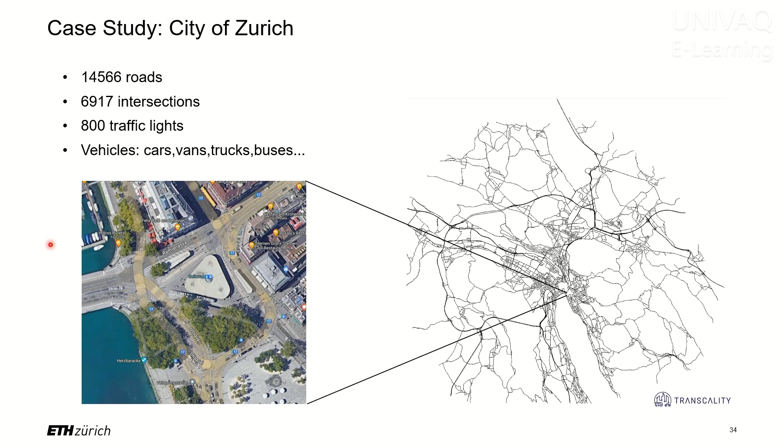So this is a little chunk of simulation. This is a micro simulation, it simulates individual vehicles with following policies and so on. And you see them at the different traffic lights around this intersection that we can use to control the flow of cars.

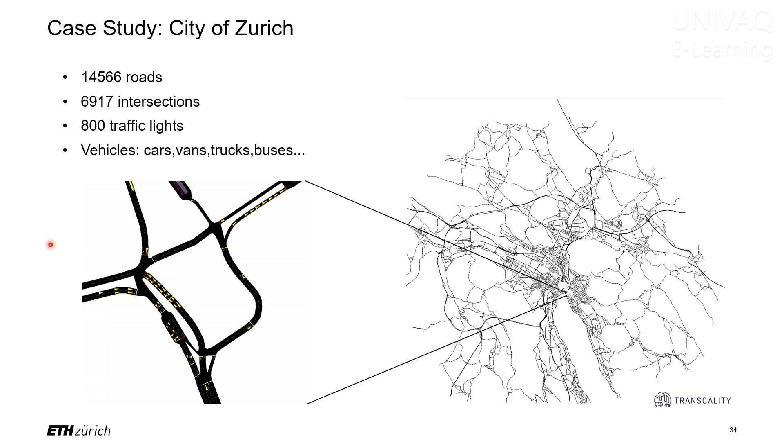For the actuators, we went to the city of Zurich. The city of Zurich has 47 traffic lights around the city that they control. They now control their duty cycle mostly manually. They've positioned these on purpose on high volume traffic flows. And what they're trying to do with these is protect the city center from congestion so that you get as much flow through that as possible.

The flip side of this is they tend to hold people outside the city center for a long time. I have one of these, it's a drive I used to take coming into the city, and you see that there's cars backing up there because they're just trying to keep them out there. So what we'll do is actuate these 47 traffic lights that the city of Zurich actuates anyway, but instead of having fixed rules and manually changing between them, we'll just do it automatically using this DeePC algorithm, the optimization algorithm.

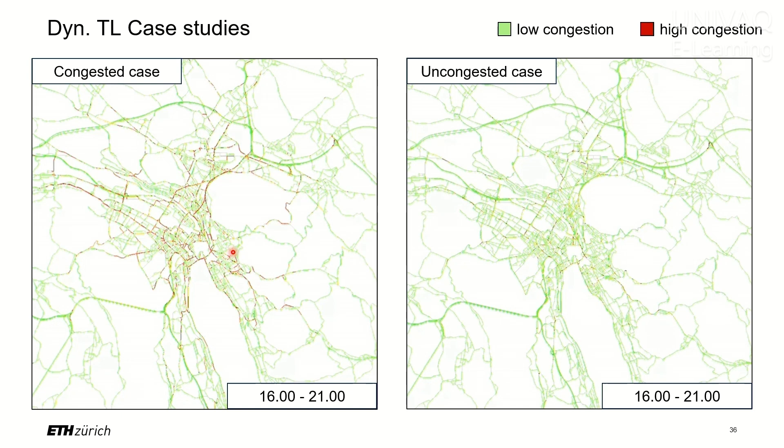And this is how it works. This is the uncongested case, first of all. This is the no control case, whatever policy is fixed to the traffic lights to start with. The last one is our approach, this DeePC approach, using the data to do this. And then in between is the method I mentioned earlier from Nicolas Geroliminis and Isik Sirmatel, fitting a model, a linear model admittedly, and then trying to do MPC with this.

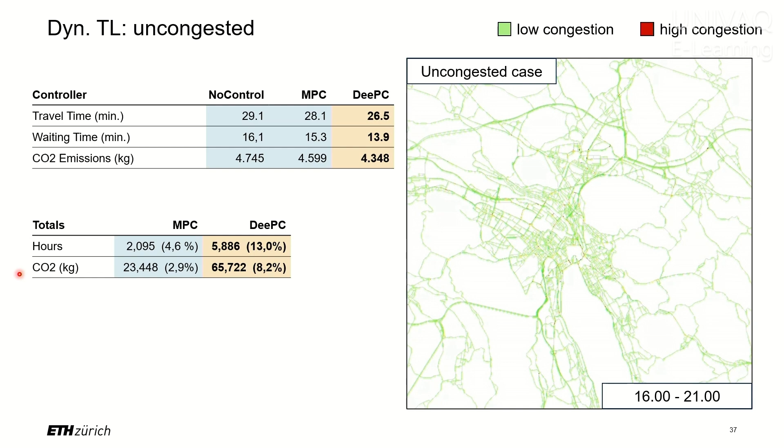And this is how it works. You see, you do get an improvement with MPC over the travel time and the waiting times and the CO2 emissions, but of course you get much bigger with our method. This is the total savings that you get in terms of hours spent during the uncongested case and CO2 emissions. And you see it's quite substantial, 13% savings in terms of timing over the no control case and 8% savings in CO2 emissions. That's for the uncongested case.

For the congested case, the percentages are not as good because the city is already at its limit, so it's trying to carry as much traffic as possible. So basically, you're going to delay people no matter what, either in the city or outside. So the algorithm does what they do manually now, trying to keep people a bit further out so they don't congest the center of the city. You see the savings are quite a bit less. It's 3% more or less for CO2 and hours.

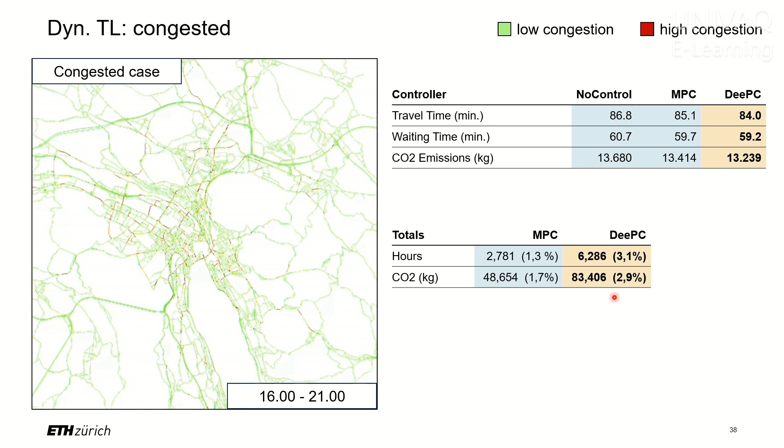But of course, the absolute numbers are bigger simply because there's just so many more cars in there. So you save quite a bit in terms of tons of CO2, even though percentage-wise it's not that much better than the uncongested case. The no control case.

Now, why does this work? That's a good question. The short answer is I wish I knew. There are some reasons why you would not expect it to work, because it's very much linear thinking. You look at range spaces or the images of matrices in a nonlinear system. So a linearly inspired control on nonlinear dynamics. Our conjecture is that the reason why it works is this local linearization by sparse column selection.

This is something we also observed for the first time when we tried this method on energy management in buildings. And there you saw very clearly that the system was just picking a subset of the columns that had to do with the ambient temperature to do the control. It was a mildly nonlinear system, so it figured out by itself which columns to pick to do the control.

And this in turn suggests that the input-output relation we're looking at, from the traffic lights to the density, is actually more linear than it seems. It looks like it must be a very horrible relationship, but it's probably not too nonlinear. And we're trying to figure out a way of quantifying this observation.

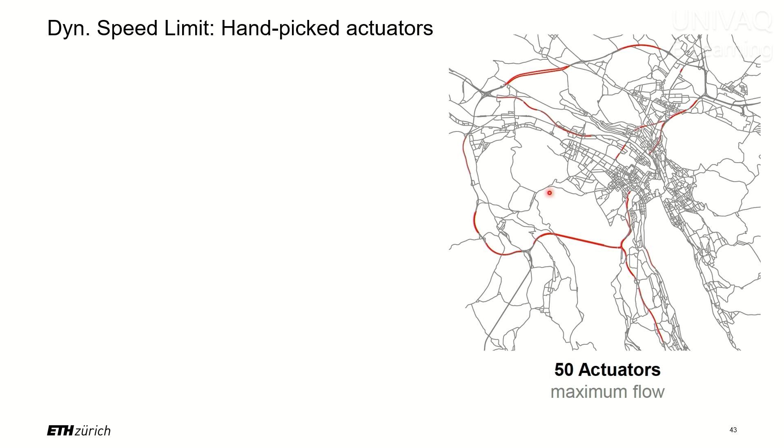Now they don't actuate speed limits in Zurich, but we can do it in the simulation. So we hand-picked a bunch of roads, and we actuated, you see them marked here. We actuated the speed limit there using this pulse width modulation scheme. And then you get, again, savings in average travel time, waiting times, and so on, comparable to the ones we had with the traffic lights.

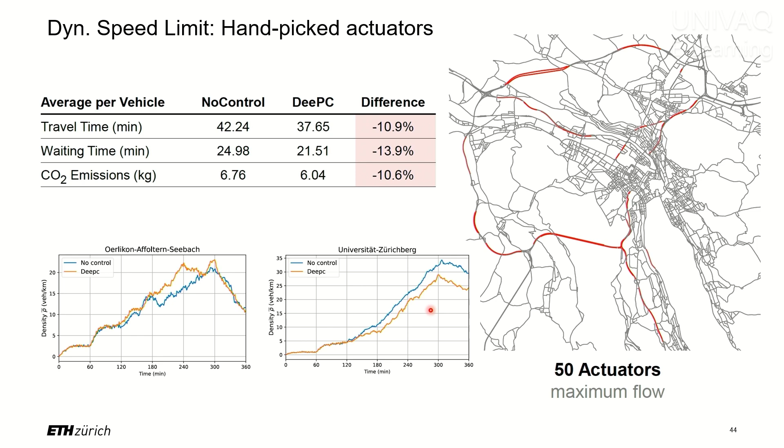Here you see a little bit what the system is doing. This is also trying to delay cars, for example, so the algorithm sort of pulls some of the demand earlier so that you get to avoid congestion later on in another area. So basically this is the center of the city, this is in the periphery, so you keep cars a little bit more in the periphery to avoid congesting the center at a later time.

Okay, so that's it. I'm going to wrap up. Like I said, we're trying to write a paper on this. There's not even a paper yet. We're planning to send it to Transportation Research. And the whole idea was a behavioral representation of traffic. And we went for this because it's quite flexible. It has a few knobs that you can tune, but not too many. Not too many hyperparameters in there.

It doesn't require a lot of expertise, so it's very good to talk to practicing people, like the city of Zurich and our partners at Transcality about this. And it sort of allows you to combine different things like traffic lights and variable speed limits and so forth. Where we're stuck is we're trying to understand the traffic engineering interpretation, why these two actuators behave in a similar way, are there benefits of having both, and what these are.

And like I said, this is really a network system. You have a small number of regions, but still it's a network system. So we're trying to do a distributed implementation, breaking it down into sub-regions and doing the same kind of calculation, but in a distributed way. The theory for this is done. We're presenting a paper at ECC with another student of mine and Alberto in a couple of weeks, how to do distributed implementation of DeePC, this data-enabled predictive control algorithm. And we're going to try it on the traffic system to see what are the benefits. It's basically, as you can imagine, ADMM meets DeePC.

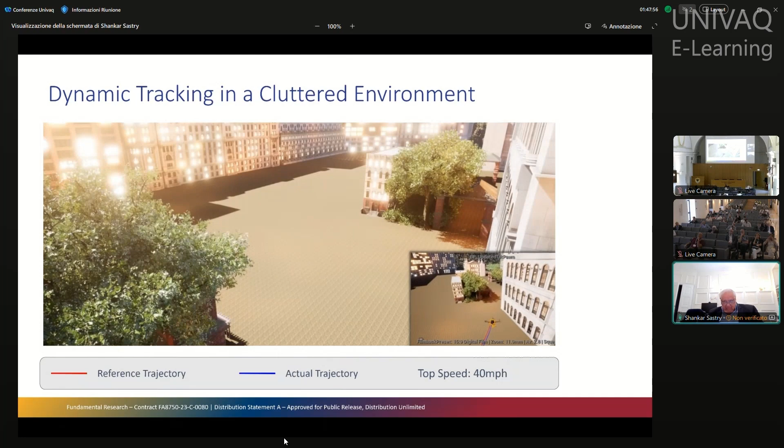And also, just to give you a sense of acrobatic maneuvers, it's not like a unicycle, it's not a plane, it's full-scale models which involve exercising a certain degree of freedom. And here is an example of a figure in full 3 dimensions, which does this loop, a figure 8, in order to exercise all these degrees of freedom with the tilt rotor. These tilt rotors are now quite popular, in that they're being used inside air taxis, all of this personal aviation. So here's an example.

This is a Cal team, AI Racing Tech. And they've been racing this car using neurosymbolic methods. So I want to give you a sense of what this is.

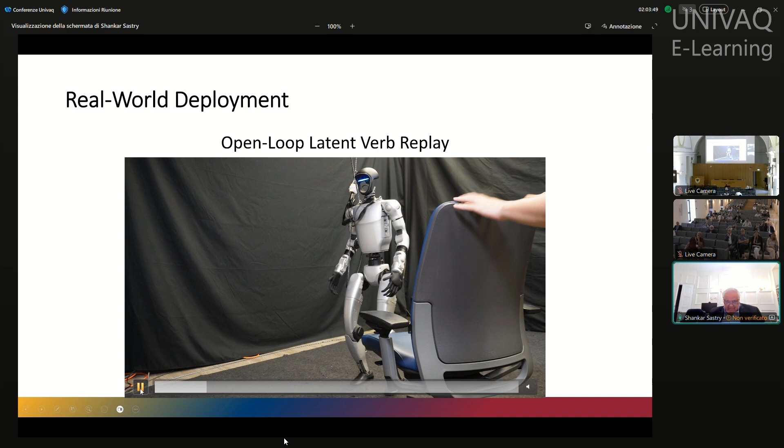And when you put it all together, here's an example of how you can come up with something that stands up. See, when you stand up or sit down, you actually use your arms in order to be able to stand up. Actually, as I'm getting older and older, I know I really count on my arms to help me get up. So another one is, and this is to show you that because it's only proprioceptive, it can be pretty jerky motion. There are jerky motions there. It seems to be living on the edge of disaster to sit down in a chair. But nonetheless, he is successful in doing this.

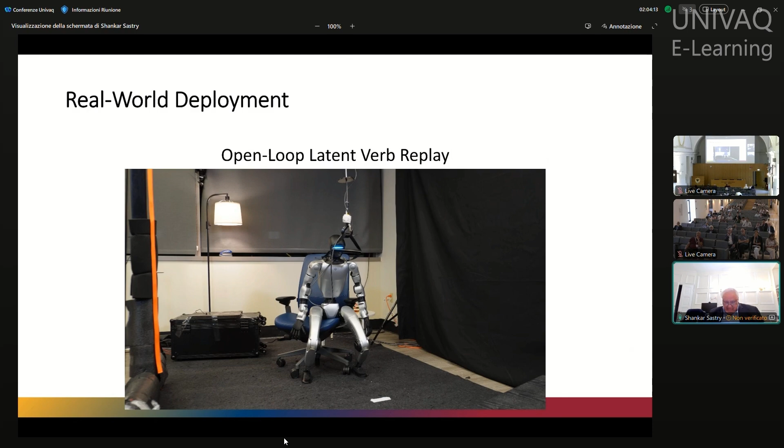And finally, this last description is go sit on the blue chair. And you can see he had the sling to make sure it didn't fall. Okay, so Monica told me, don't make it too serious, so I thought I'd just show you lots of videotapes. But there's a story in there.

And the story in there is the intellectual successor to adaptive nonlinear hybrid systems. And that is a conference which we've started, which we had last year in Berkeley, called Neurosymbolic. And the second one was at UPenn last week. As you may know, there's a conference called L4DC, which is running this week, actually, in Ann Arbor. Next year, L4DC and neurosymbolic reasoning will be co-located together.

A supermartingale is a stochastic Lyapunov function. And amazingly, we can use it. So the story about this, the racing with the Markov game, is that the potential function, the epsilon potential function, is actually a supermartingale that can be used to provide probabilistic proofs. Having said that, there are some differences between the probabilistic scenarios and the deterministic scenarios.

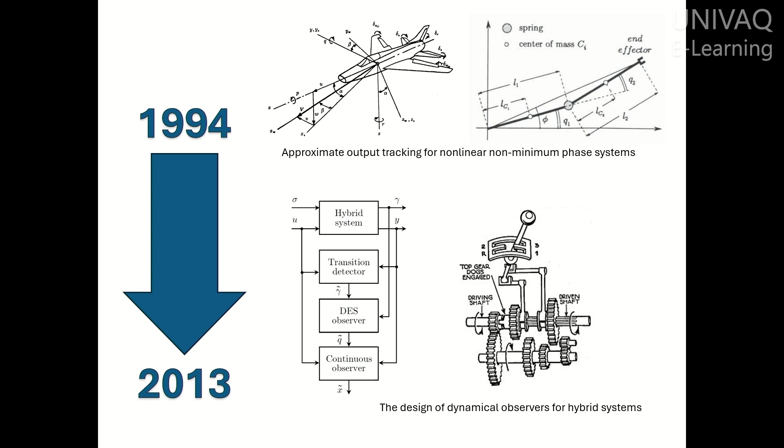This methodology was applied to engaged gear identification for a car, in which the input is the gear selected by the driver. You don't know the input. When the driver selects a different gear, the dynamics of the system change, and so you have to detect which gear is engaged just having as feedback the continuous time evolution of the continuous variables. This methodology will be illustrated in a while by Andrea in his presentation.

As a student and researcher, I spent so much time with Marika that she became more than a colleague, I'd say a friend. I totally agree with Jesse that fruitful research depends mainly on the joy and pleasure of working together. Marika is so special and important to me that it's very difficult to express all my feelings. So I tried to select all the qualities I have come to appreciate over time. I hope this is not too over-sentimental, and this closes my presentation. Thank you so much.

Now it's my pleasure to introduce Andrea Balluchi, who is the founder and CEO of PurePower Control, and he will present the details about the methodology to construct dynamical observers for hybrid systems and the application to industrial cases.

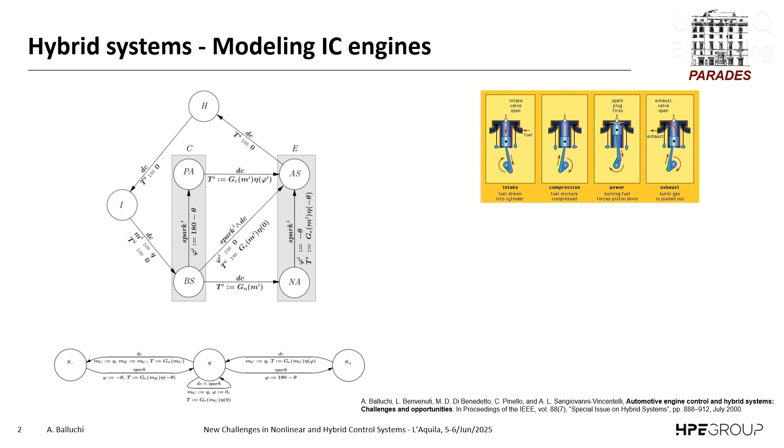In fact, at that time, the engineers in the industry developed the electronic control algorithms using mainly mean value models of the engine. But as you know, the internal combustion engine has a very complex behavior that involves both discrete components and continuous components. So we proposed a model of the internal combustion engine where the phases of the four-stroke cycle are represented by a finite state machine.

The first input, the spark, is an event, so in the discrete domain. The second input, the fuel injected, is again discrete in time but continuous in values, and the pressure of the intake manifold, which is controlled by the throttle angle, is instead represented by a continuous system.

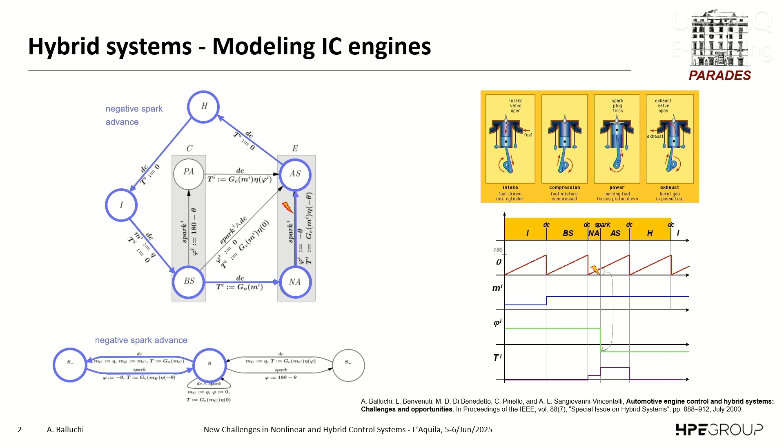So this was quite a novel approach to modeling the internal combustion engine, and was the basis for the development of several new algorithms for engine control. The first one that we considered was the cutoff control. The cutoff control is a control strategy that is triggered by the engine control when the driver releases the gas pedal, so requesting no torque to be produced by the engine.

In this case, to save fuel and to reduce emissions, the fuel can be shut off, but if this is done immediately, then the elasticity of the driveline causes unpleasant oscillations of the driveline and of the vehicle. So before shutting off the fuel, the elastic energy of the driveline should be driven to zero.

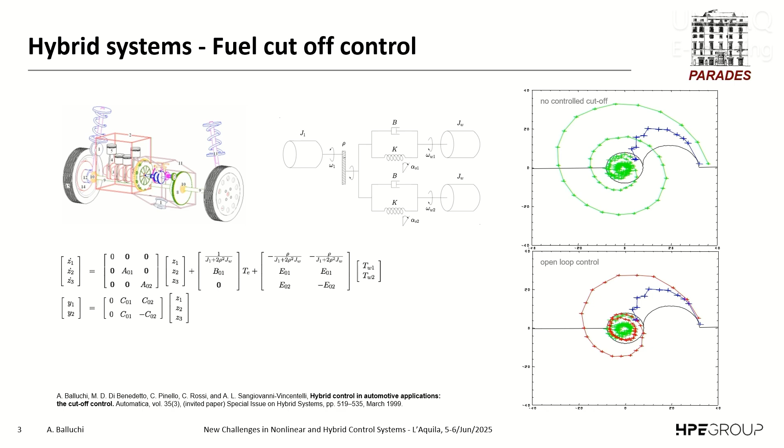And as you can see in the picture on the right, the green trajectory is from experimental data when the fuel is cut off immediately. The blue line instead is the optimal control that we developed using the hybrid model of the engine to optimally drive the state to zero. And this was our first control problem that we tackled.

I'd like to mention a second one. This is the identification of the engaged gear that was already mentioned by Luca. The problem in this case was that the engine has to know in real time whether a gear is engaged and which gear is engaged.

We first developed a general methodology for hybrid observer design that was presented at the Hybrid Systems: Computation and Control Conference 2002, and then we applied this methodology to the problem at hand. These are some experimental results where it is shown that the hybrid observer can, in a robust way and promptly, identify the state of the engaged gear with very little delay.

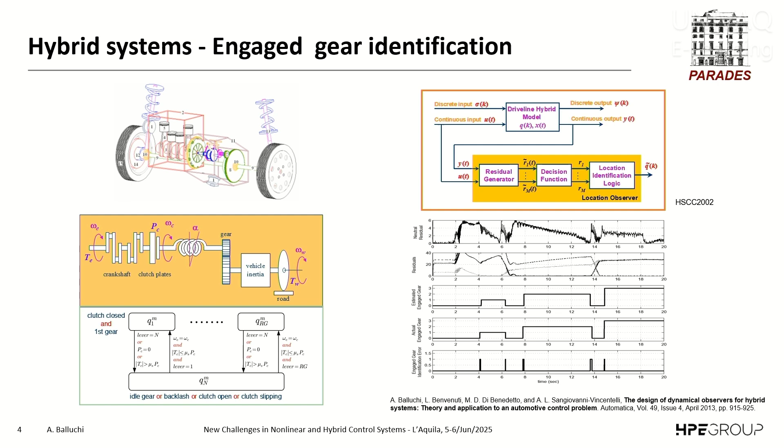And we have tackled many control problems successfully, developing the application of hybrid system control theory to the automotive sector and in particular engine control, but I don't have the time to mention all of them.

Later, the collaboration with Marika proceeded when I founded Pure Power Control in 2008, and there the mission of the company was to support the automotive industry in the design and development of electric and hybrid electric vehicles. So the focus of our collaboration moved from the engine to the powertrain, the electric powertrain. And we received many students from L'Aquila.

And our current common research is related to the development of a model of a fuel cell vehicle, where in particular we focus on the hybrid modeling of the thermal management systems.

I'd like to thank Marika for the profitable collaboration that we have had since 1997. It was a real pleasure for me working with Marika. The scientific community knows Marika for her important results in control theory, but I could appreciate also her passion in control applications and her deep attention to detail, understanding the problem and investigating how the most advanced control techniques can be applied to the real problem.

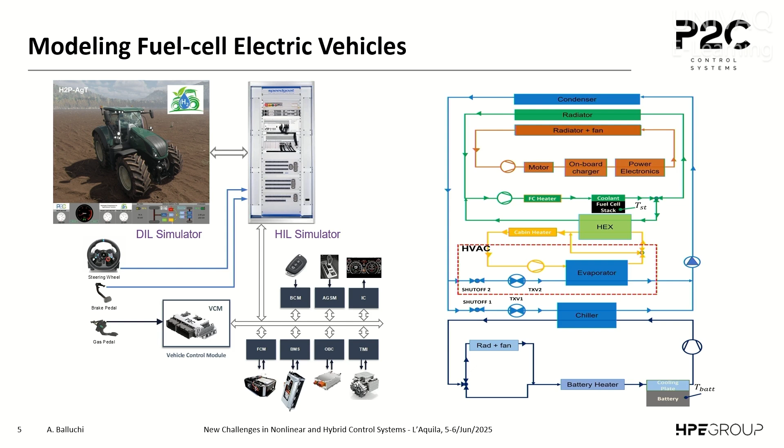Now we come back to sharing memories. So it's my pleasure to introduce Professor Enzo Chiricozzi from the University of L'Aquila.

Good morning. Many thanks to Elena for the invitation to this important event, which focuses on the interesting and appreciated research work of my colleague Marika, pride of our Faculty of Engineering. In order to better frame the importance of the Center of Excellence in the development of the faculty, allow me a brief introduction.

During the 9 years of my presidency, I was convinced that the scientific role of the Faculty of Engineering was of fundamental strategic importance, and I therefore devoted constant efforts to enhancing and increasing the cultural heritage of the faculty, taking into account the wealth of high-level skills and competencies present in the 5 departments of reference. This made it possible to expand relations with other national and international research institutions, to enter the main European research circuits, to increase contracts and collaboration with industry, and to relaunch the internationalization process.